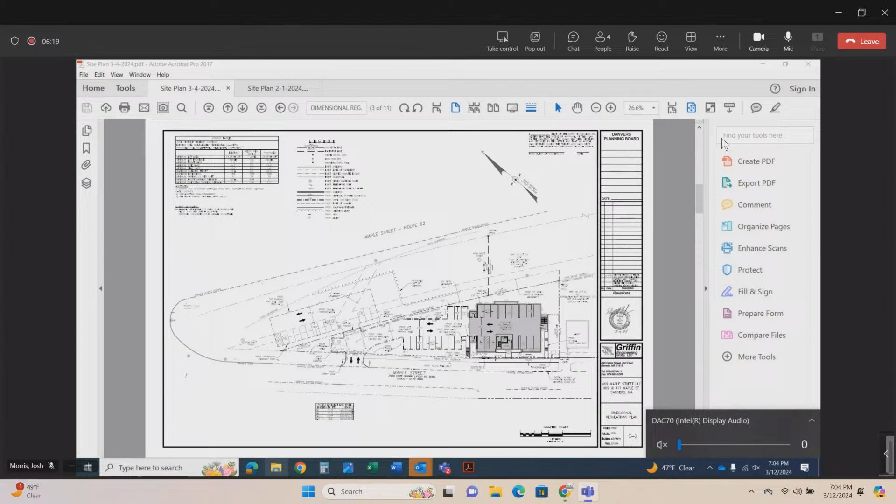As a result of this project, we have a net new of 10 units, because there's an existing 3-family on the site, and we're proposing 13 units. We are in compliance with the affordable housing component, providing 1 affordable unit, which would be a 2-bedroom unit since all units are 2-bedroom, as well as a monetary contribution of $70,000, in accordance with Section 29 of the zoning bylaw.

As a public contribution for this development, the developer is proposing to provide off-site, on the abutting lot owned by the Danvers Electric Division, some gravel parking area. This is the area where the rail trail extension is going to be, so we thought that would be a good public amenity to add to the project.

We worked with the planning department and also met with the Rail Trail Committee back in September of last year, receiving unanimous support for the creation of 12 parking spaces in a gravel parking lot. We would also provide an access easement over the project to access those parking spaces. So the applicant is proposing to construct those parking spaces, the gravel parking lot, contemporaneously with the development of this project.

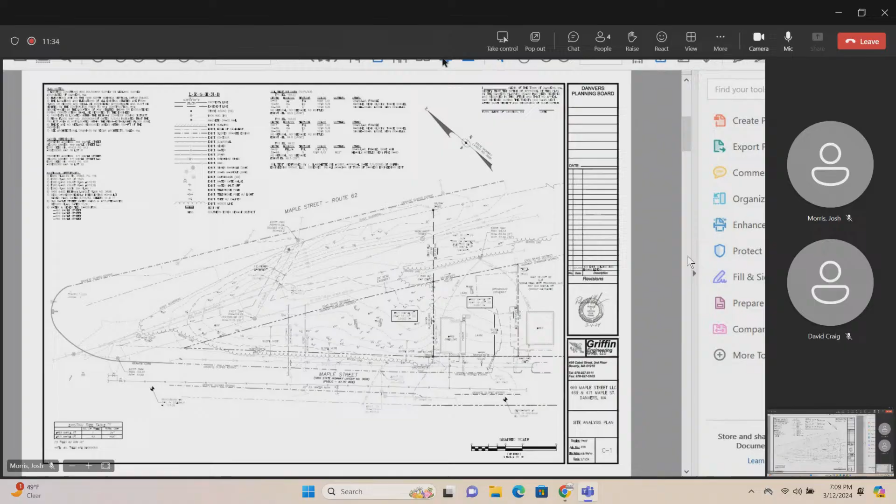The electric department obviously owns the adjacent parcel. The adjacent parcel is about one acre in size, and they've got some very tall, high voltage transmission lines on there - one tower here and another tower there. There's also a SESD sewer easement that runs through the property. There was a sewer line constructed on the parcel in approximately 1977. It's 30 inches in diameter, so it's a good-sized sewer, and it's quite deep - about 23 feet at the eastern end and about 36 feet at the narrow point of the triangle.

We've had discussions with the SESD as we've been going along. We're obviously trying to make sure that we don't do anything to the easement or to their sewer line. We're going to have to raise up a sewer manhole, and we've spoken to them, or transmitted plans to them, about how we're going to go about doing that. We're going to reuse the building service that connects to that 30-inch sewer line as part of this work.

Okay, so let's go to the next one, please. Again, pretty straightforward site layout. We've tried to respect the shape and work with the property as much as we can. In the process of the back and forth with the engineering department and the electric department, we've moved the parking lot for the town's bike path a little closer to the point, the narrow point of the triangle, to better situate the parking spaces. The electric light department wanted to have the parking spaces so that they were not directly underneath the high voltage wires, so that if ice in the winter or something else fell off the wires, it wouldn't be landing on the cars directly. So that's how we ended up with this particular alignment, and why it might be a little different from some of the earlier plans you may have seen.

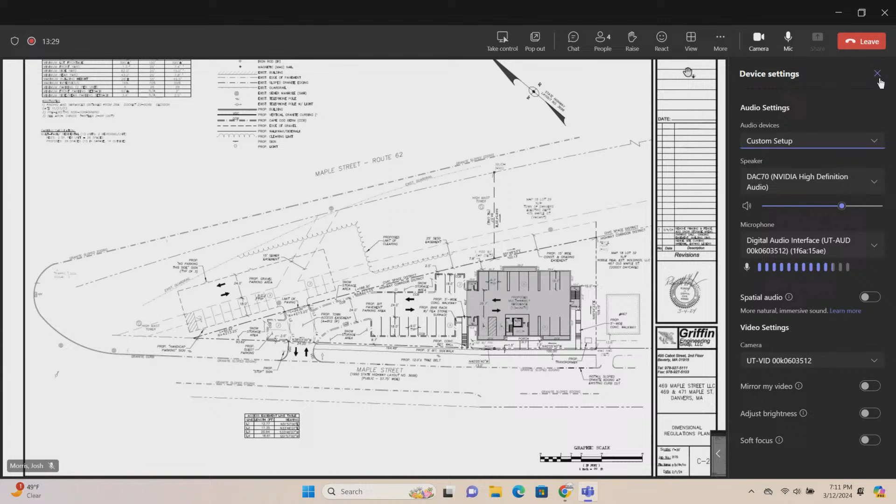We're also showing on this plan a 15-foot wide easement here - this is to allow grading and access during construction. And we're showing an easement here to provide access to the town property across the private property, so that would be for the future bike path parking users.

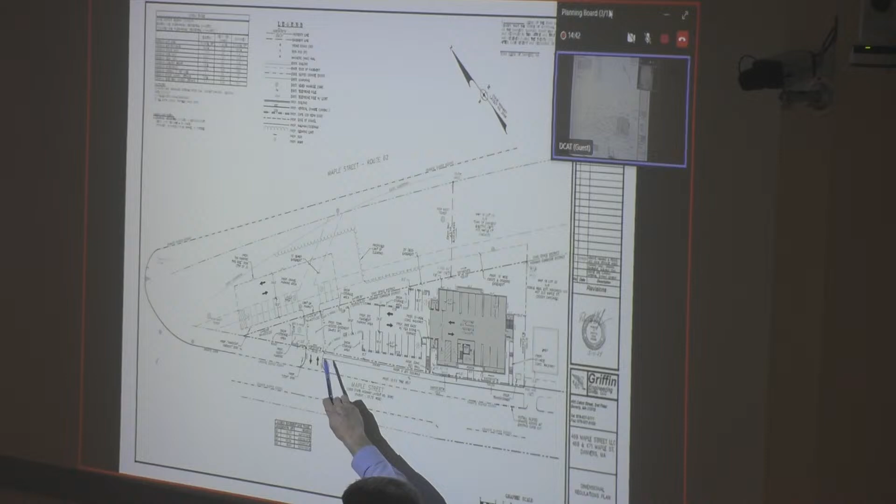Front door of the building is here. We've got access around the sides here and a lower level access out to the front here. We've got about... I think we've got about 400 or 500 feet of sidewalk that we're going to construct along the frontage of our property, connecting the doggy daycare here with our driveway. There's a public sidewalk on the opposite side of the street that connects to Leahy and back down towards the town fire station.

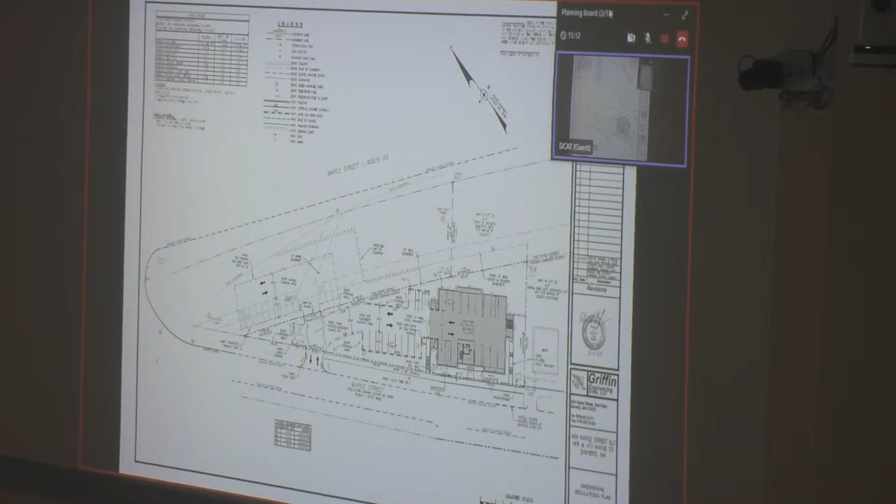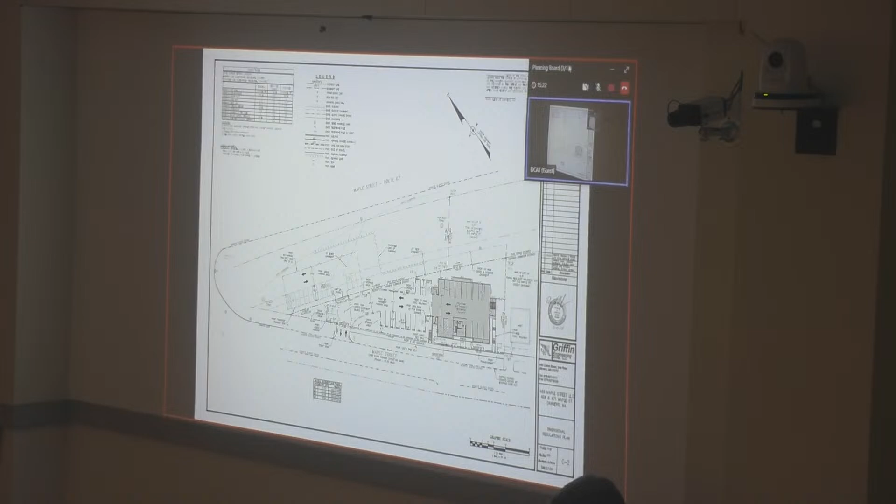The building is about 110 feet wide and 75 feet deep, with 3 stories of residential housing on top of 1 story of parking. There are 5 two-bedroom units on the first floor, 5 on the second floor, and 3 on the top floor. The building narrows down in usable area as you get to the top because of the residential gables and architectural detailing for that area.

The overall height of the building is 47 feet in a zone that requires 55 feet, so we're well below the height requirements. It's a nice-looking residential-style building.

Site impervious surfaces will be at 59% after construction of the building, parking lot, and sidewalks, compared to a 70% maximum allowed in this zone. So we're well below the impervious requirements.

The impervious surface also triggers a stormwater management system underneath the parking lot. Here is a stormwater infiltration system. We're going to take essentially 3/4 of the roof runoff and pipe it into that infiltration system, with a couple of catch basins and a pre-treatment device to direct water into the infiltration basin. After the infiltration basin, if its capacity is exceeded...

Thank you. No worries. I'm getting shorter every year.

The discharge will come out to a location right here, a level spreader discharging any excess water in the direction it currently flows.

We're also creating a fairly level area for the town bike path parking. It's a little hard to see the proposed grades, but basically 112, 111, 110 at that corner, so a very flat parking area.

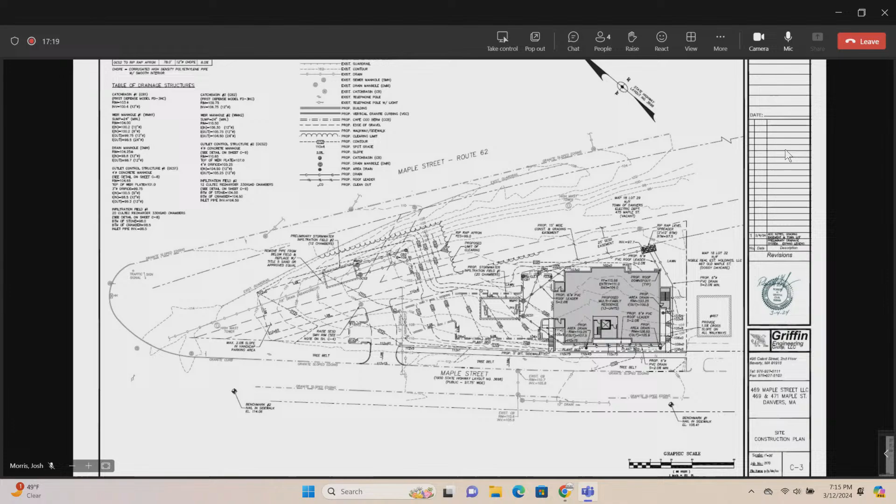As we enter the property, we drop down to our basement level parking, with about 8 feet of grade change from here down to the basement level. We make up most of that here, and a little bit across the parking lot, across those 9 or 10 spaces at the front. It's all paved, all curbed, and all stormwater is directed into our new stormwater management system.

It's pretty straightforward for this type of development. We provided a stormwater management report to the engineering department, and I think they're satisfied with that based on the most recent comments we got back.

Flipping to the next sheet, touching on site utilities: there's a 20-inch water line in Maple Street, so we'll bring in a fire protection line and a potable water service line off of that to serve the building. Sewage goes out the back into the 30-inch sewer line that SESD owns. Our parking garage gets treated through an MDC trap that also discharges into the SESD sewer line.

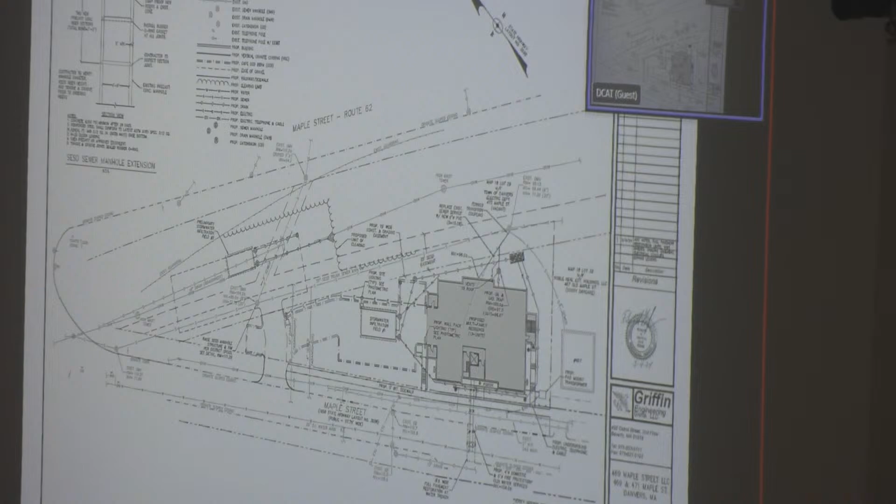On the plan you can see we've got a couple of outdoor light fixtures. These are about 16 feet tall, downward casting, shoebox style fixtures to minimize casting of light onto adjacent properties or toward the roadways.

We also provided a photometric plan, which is the next sheet. It's just got a bunch of numbers on it, but basically it shows light in the parking lot where you'd want it, and a couple of light fixtures on the wall of the building as well. By the time we get to the perimeter of the site, we're at 0-foot candles, so we're not casting light onto adjacent properties.

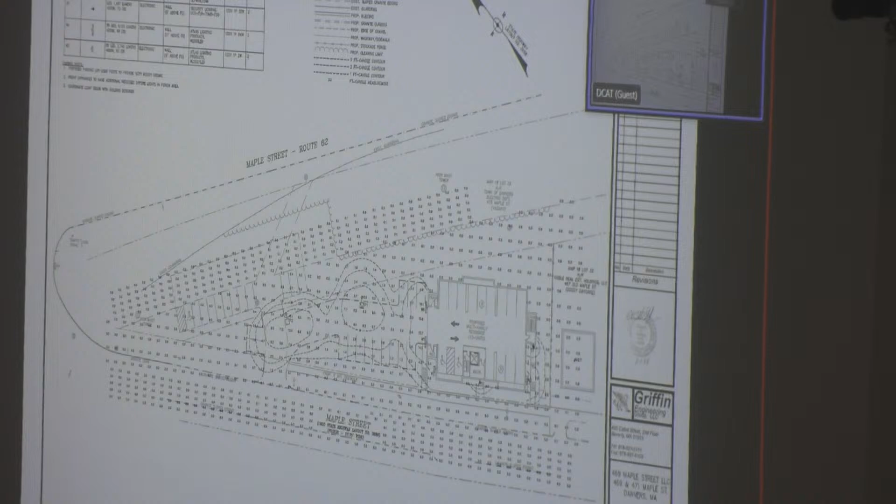Next is the lighting plan, followed by the landscaping plan, which was prepared by Laura Rutledge, our registered landscape architect.

One of the nice things about this site is that we have a pretty significant distance from the granite edging in Maple Street to our property line. So it looks like we have more grass or more room for landscaping in front of our building than we probably really do. So we're going to be filling in that tree belt with 9 trees.

We also are going to be placing some trees close to the building. The trees in the tree belt are going to be hawthorn, redbud, and I think a couple of ironwoods, also known as hornbeam, here and here in front of the building.

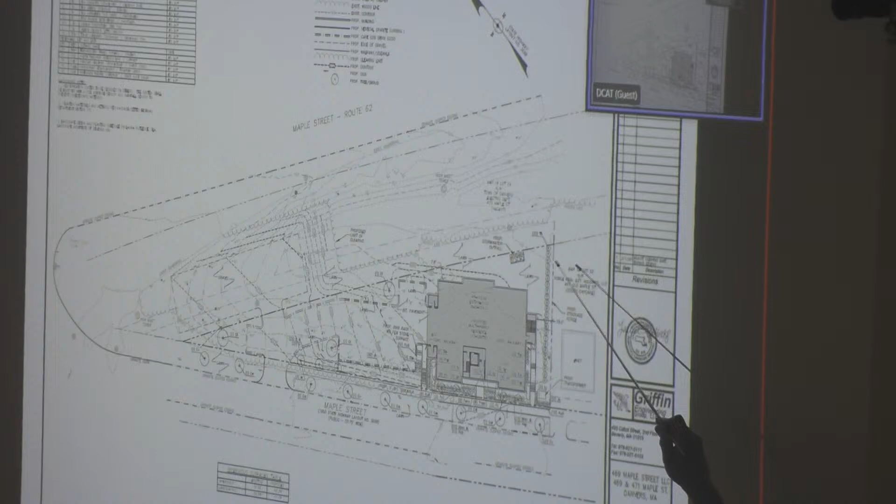On the property itself, closer to the building, we've got some Crimson Point cherry trees, which are sort of narrow and upright, a number of perennials and shrubs around the front of the building as well. There's an arborvitae hedge along the doggy daycare side, and there's also a few trees, some maples, and I think there's a pin oak right there at the far end.

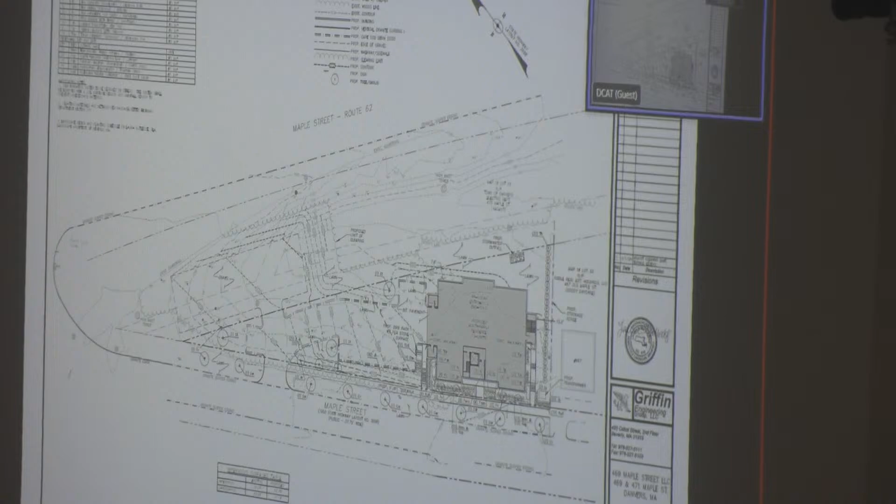So I think it's a very well thought out landscaping plan, and I think it's going to beautify this section of Maple Street quite a bit. And with that, I'd be happy to begin addressing any questions.

Oh, okay. Yeah, we didn't, I don't know if they're in our set. They're in the February 1st, first set. I could bring it up in a moment.

So here's our second floor and third floor plan. Our first floor plan is very similar to the second floor plan, but you can see we've got 5 two-bedroom units on the second floor and 3 two-bedroom units on the third floor.

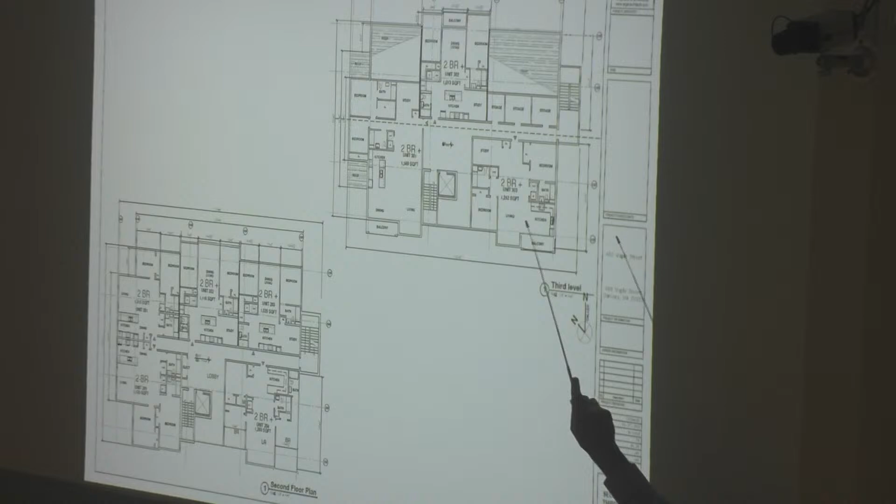We lose a little bit of the building space here and there, and over on these corners, and that's because of the gables dropping down and limiting the available living space, basically.

And if we go to the next sheet, I think we have some elevations. So this is our front elevation here, and again, you can see the number of sort of dormers and these gables all sort of making a nice residential appeal to the building.

The area in front of here gets landscaped. The first floor is up a couple of feet from the grade, and that was necessary to allow us to make the basement parking level work and have a reasonable slope from the basement level out to the street.

Here's the garage door. We have recycling and trash rooms on each side there. But again, pretty straightforward, nice colors, I think, and certainly a lot of the 6/1 windows give it a nice residential feel as well. Go to the next sheet, please.

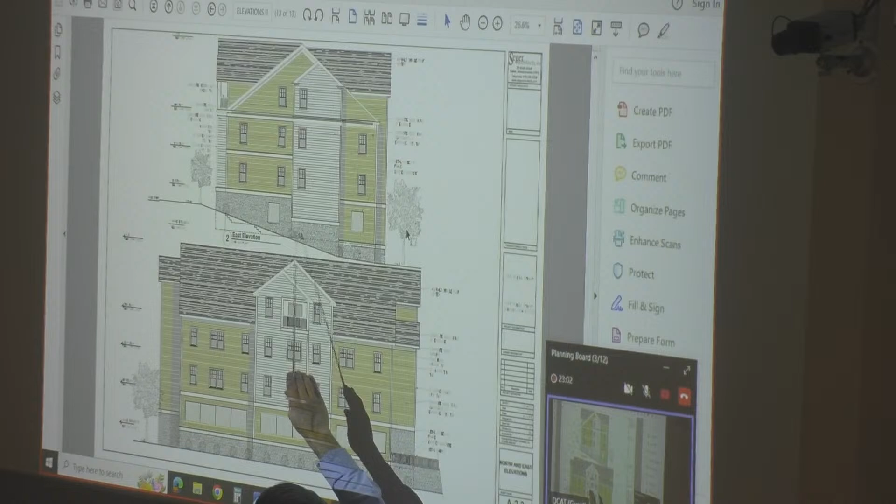So I think this is the back of the building, and here's the side. You can see the stairwells coming out from our emergency access. Here's a stair tower on that side of the building, and access up to the street through the staircase. Again, if you have any questions, we'd be happy to address them at this time.

All right, questions from the board. Tori? Question for staff. On the publicly available maps, this combination of 2 lots looks like it is split between highway corridor and residential zoning, and that is contradicted by documentation with those maps, but I just want to clarify for the record, this is highway corridor, correct? Yes, both lots are highway corridor. I don't have any questions for the applicant. Thank you.

Lou, questions? Sure, yeah, just some questions for the applicant with respect to parking layout. I'm a little confused in terms of the number of parking spaces. I thought I saw in some areas of the package that it's 2 spots per unit. So are there 28 total spaces or 29? There's 29 total spaces, and we have 3 extra as compared to the zoning requirement. Okay, so the 3 extra, okay.

And in terms of how they're going to be provided, I understand that there's going to be an underground component as well as an outside parking area. In terms of how the units are, I'm not sure, is this going to be ownership units or rental units? Condominium units, and so we would probably have at least 1 parking space assigned to each unit.

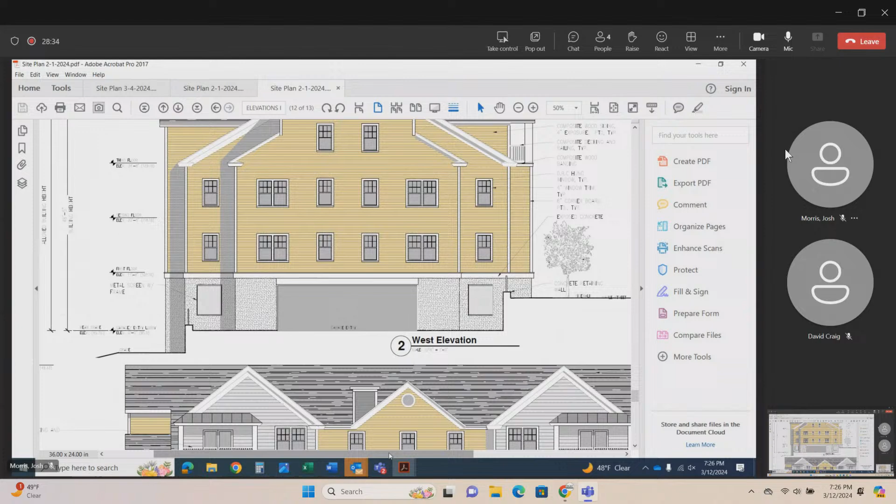So the garage entry, is that just going to be open to get to the below-grade parking? I believe he's showing a door at that location now. When we design these enclosed parking garages, it sometimes actually costs less to have a garage door due to heating and ventilating requirements, versus having it open and allowing freezing conditions to develop. That detail hasn't quite been finalized, but it's more likely than not to have a garage door.

Okay, that was my only question, thank you. Tim, questions? No questions. Mike?

Just the parking lot for the rail trail says Phase 2 - is it being done at the same time, or at a later date? When we first submitted our application, we were looking at a phased project, which is why that showed up on the original drawings. Most recently, we've taken off the phasing so it all happens at once - again, subject to town approval.

I'm assuming it's okay that there's no lighting there since it's probably mainly used during the day, but has there been any thought into lighting around the parking for that rail trail area? Yeah, there really hasn't been any requests from the town to put lighting in that area.

We did position a light fixture at the entrance, so I think that'll cast some light into that parking area. Okay, I think so too.

The last thing I have is you talked about parking spot quantities and said it was 29. Two of them are handicapped, so you're at 27, and then 2 are guests, so you're at 25. So is it actually that one of the units will only have 1 spot, technically? No, the handicap spaces are considered parking spaces, so you don't- Right, but you can't park in that if you're not a handicap resident.

Well, I guess that's my question - is there one, are they gonna end up parking in the guest spot and then you only have one guest spot left? Is that a concern to anybody or not?

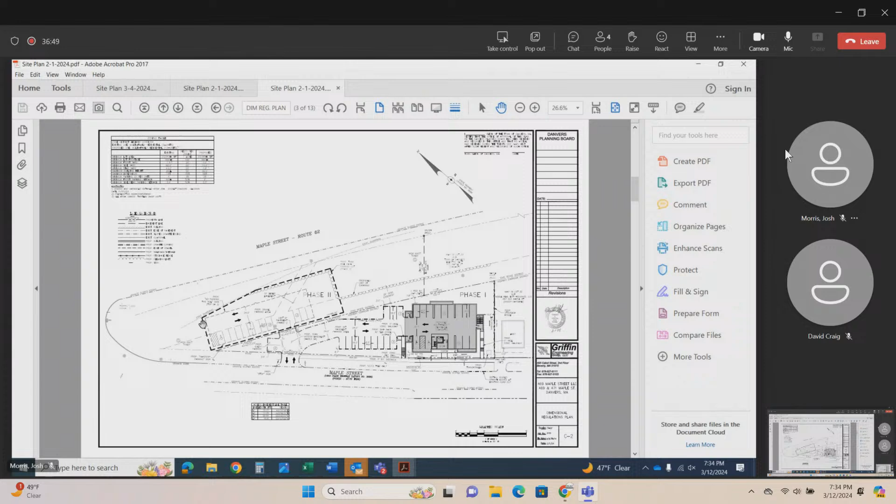The idea, when we preliminarily discussed it, was that there would be some sort of connection. We don't know the exact location, but the trail is probably going to be somewhere in this kind of area. So at some point there would be a small connection from this trail, just a small 5 to 8 foot wide path, wherever the trail ends up being located, to connect it to the parking. So that people wouldn't be walking across Maple Street? Exactly, yeah.

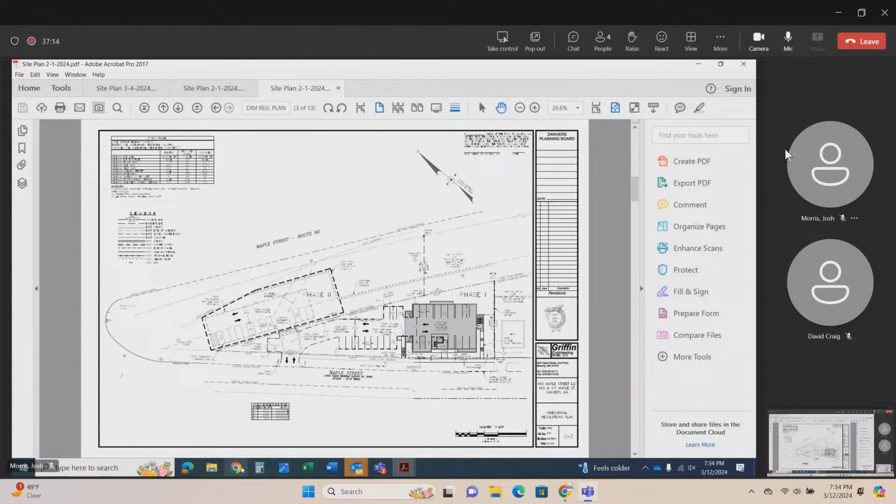I wonder if that's south of the building, because the rail trail's gonna jump across Maple Street - well, that's not Route 62, it's this part of Maple Street. Maybe the aerial would be helpful here. We have an aerial that might be helpful. Yeah, I could bring it up too. Yeah, that's what I was trying to show.

I agree with Josh that this is the logical location for the rail trail, just to the side of the power lines and Route 62. Once it's constructed, there will be a crossing so that bikes can cross over this portion of Maple Street and continue on their way to Middleton. So there would be something done here.

But right now we're not proposing a way of getting from the island, as you phrased it, to the opposite side of Old Maple Street. Right now there's a sidewalk along this side of Kirkbride, and a sidewalk that runs along Old Maple Street all the way down to the fire station, and sidewalks that go laterally up and down Route 1 as well.

But I think for the future use of this area, the parking lot here, getting directly onto the bike path would probably mean crossing Maple Street as the bike path is constructed.

It seems that the town will have to put in a sidewalk, continuing it beyond the driveway, because people drive quite fast coming off the ramp for Route 1, going by Supino's, and then heading the other way toward Route 1 to jump on. So if you're adding another 26 to 30 people, and potentially people using that lot for rail trail parking, we just want to make sure people can get out safely. I'm not imposing that burden on you to extend the sidewalk, I'm just wondering how it's all going to come together.

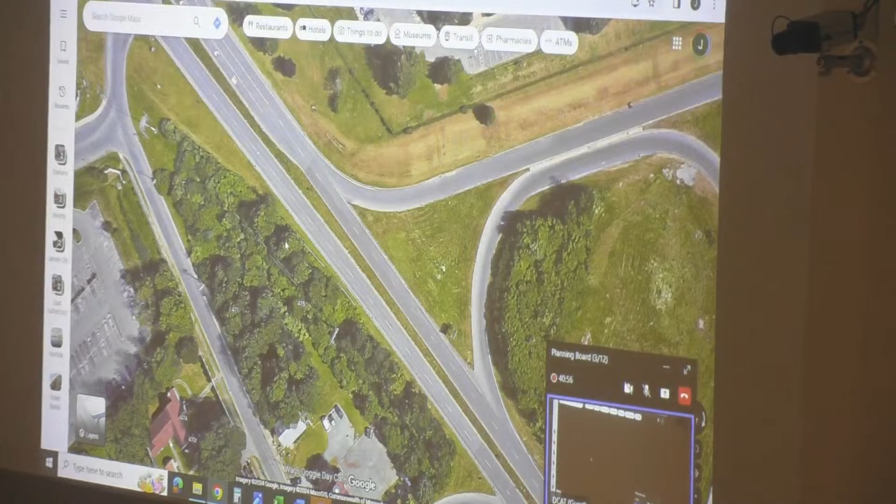So at some point the rail trail crosses the street from Spring Street. That's right, Nichols, Maple Street, and then it goes to Middleton that way, and then goes this way. Where do you cross over, at Nichols or Spring Street? That's probably one of the more... down here, we're sort of getting away a little bit, but there are several different iterations and designs, because right now the trail ends right here.

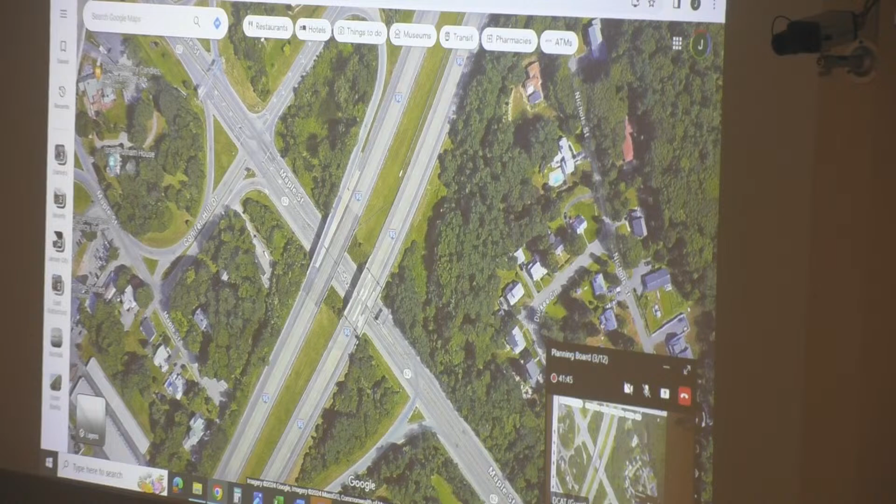This piece is something we're internally trying to figure out the best way to do. Do we cross Nichols here and keep it, or put it over here? That's what I mean by different alternatives, and I don't know if I'm saying things I shouldn't say in public. There are three different design options we're working through, and this side is the harder piece we're trying to figure out. Then the trail will go underneath these two overpasses, continuing towards the project we're talking about tonight.

Okay, well, I think the building's a very attractive building. I think it is a good use for the site, and with the parking, it's got adequate parking, so I don't really have any questions on the plans itself.

I think Lou has a follow-up question. Yeah, just a quick follow-up question, and this might be more for staff. I was looking at the engineering second comments. I guess this was one dated March 8th, and I just had a question. I was going through, and this is at the bottom of page 3, dealing with snow storage.

I was a little bit confused because typically, looking at it, they go through each point by point and then say 'no further comment from engineering.' But I see both number 7 and number 15 — one deals with snow storage, one deals with elevation for water service — and then I see 'no further comment from engineering' as to both. I assume that's related to both comments, with respect to snow storage as well as... you know what I'm saying? Because typically engineering responds to each one, and here there are two points but only one engineer's second comment.

Yeah, I can't speak to... oh, it looks like a page got missed from the PDF. Is that it? But everything was, we're basically satisfied, with the exception of the future stormwater analysis associated with the gravel parking lot. And just to satisfy your issues or concerns, Lou, there's a condition that everything in here has to be satisfied in the decision.

That didn't make its way into the revised plan set, so we would like to remove that proposed stockade fence. Any questions from the board on that? Again, where is that? It's to the right of the proposed building. Which plan, Bob or Nancy, shows that best? C2. It was on one of the sheets. It actually shows up on sheet C6, which is the landscaping plan. We took it off of the site plan, but failed to take it off of the landscaping plan. That's what happened there. Okay, good. So I noticed it when Bob was talking. Proposed stockade, right here. So I'm sorry for that inconsistency. Okay, I see, yeah, proposed stockade.

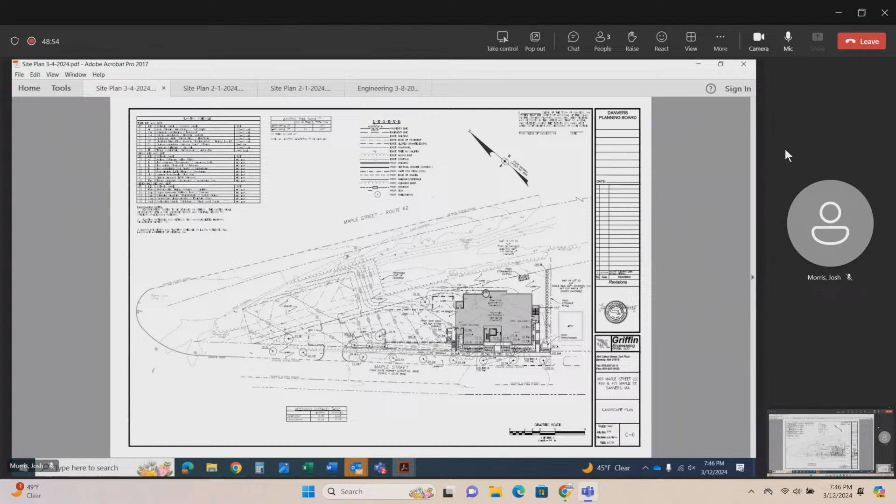So there's an existing fence there now, correct? I don't know whether there is. I'm sure the doggy daycare has a fence. There's a fence, I would hope. But we were proposing a fence, but then also the arborvitae, and that just seems unnecessary. Bob took it off of the other sheets, but when he was presenting, I saw it was still on that one. So I just wanted to be clear, we don't want to propose that stockade fence because it is not necessary, and it looks like it's along the, what would you say, southerly lot line?

Is everyone all right with that on the board? That's fine. It doesn't need to be one of the decisions on that.

Any further questions from the audience? Hearing none. Any further discussion from the board? Hearing none, I would entertain a motion to close the public hearing. Move to close the public hearing? Second. All in favor? Aye. Opposed? None. Decision, if you could read that, Lou?

Yes, okay. And I don't think we need to make, do I need to make a reference to the fence in the decision? You can add a sentence. I can add a sentence? Okay, got it, will do.

Okay, Town of Danvers Planning Board, Site Plan Review, 469 to 471 Maple Street. Date of application, February 1st, 2024. Date of hearing, March 12th, 2024. Date of decision, March 12th, 2024.

The Danvers Planning Board finds the site plan submitted by 469 Maple Street LLC for property at 469 to 471 Maple Street, Assessors Map 18, lots 30 and 31, to be in substantial compliance with the criteria and regulations adopted by the town. Details of the plan review can be found on the following plans.